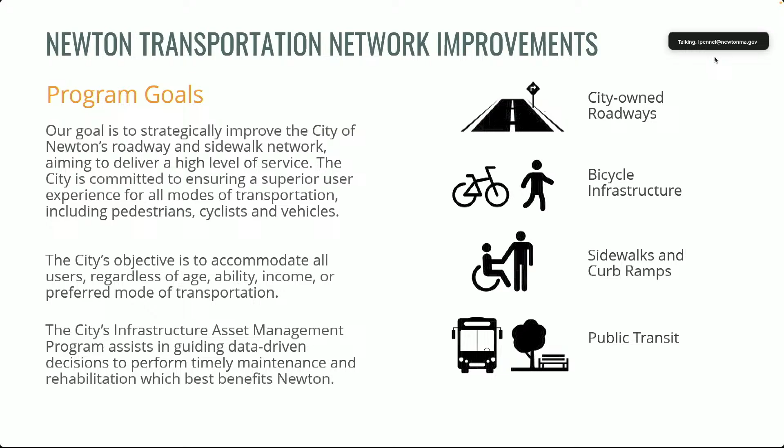So just quickly, one of the bases behind this is pavement management. Obviously, the pavement network is pretty significant here in the city, and we utilize pavement management practices to prioritize the roadways and improve the roadway network. So just real quickly, I know there's some new councilors on this group, so I wanted to start at the beginning and go through the first few slides pretty quickly since some of you have seen these before, and then we'll get into the actual program itself.

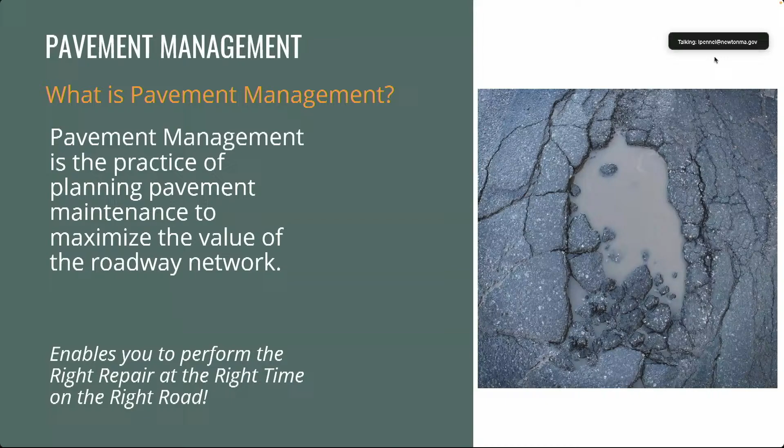This is down in Connecticut. This is a real roadway, and the town line goes right down the middle of the roadway through these two communities. On the right-hand side, community 2 believed in doing pavement preservation, which is those top of the curve treatments that keep the roadway in good condition. The one on the left-hand side didn't really like those types of treatments and performing them.

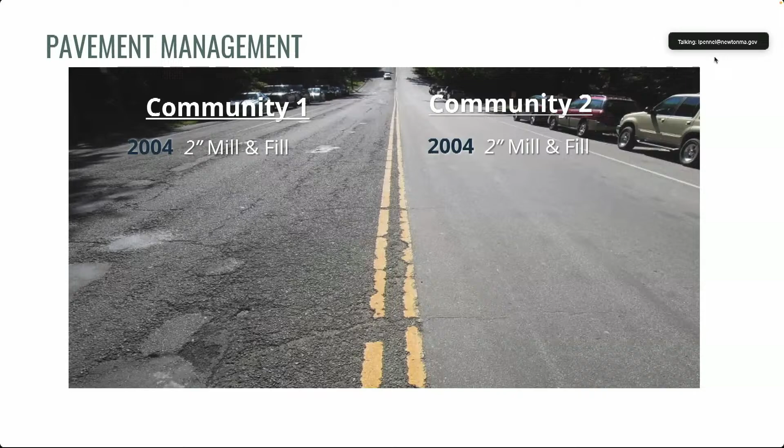So this is a story where in 2004, both of the communities got together and did one roadway project, which is your 2-inch mill and overlay - that's grinding the roadway down, basically starting with a new roadway. Community 2 approached the other community in 2010 and wanted to do some preservation. Community 1 said, we don't do that stuff, we're just going to let the roadway deteriorate, you do your own thing.

So they did a surface treatment and a crack sealing treatment, which is something you see a lot here in the city of Newton. Then in 2017, this is what the two roadways looked like. Really it's one roadway, but split down the middle. You can see on community 2's side, that roadway really just needed more pavement preservation, while the roadway on the left-hand side needed a significant repair, some type of rehabilitation, either mill and overlay or full depth reclamation.

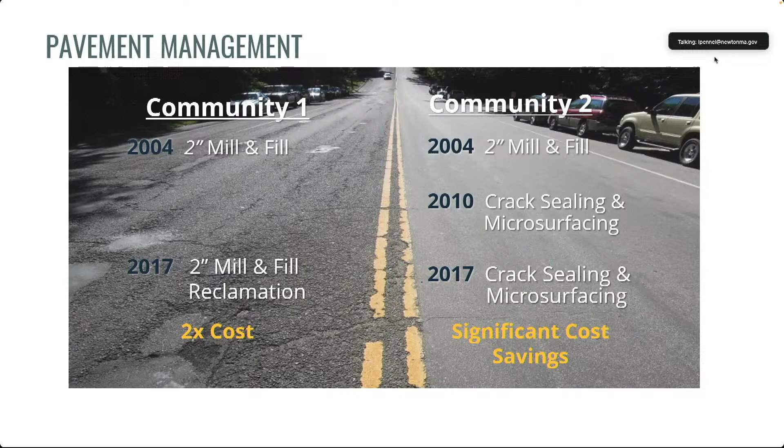You'd much rather drive down the roadway in community 2. That roadway was kept in good condition, but it actually led to significant cost savings as well, because doing the rehabilitation a second time on the roadway on the left was actually 2 times the cost of doing the preservation 2 times. So we like to say that this is the definition of pavement preservation success.

So in terms of the infrastructure assessment, I'm going to go through how we collect some of the data here in the city - about 279 centerline miles of roadway. The way that we collect the data is we actually do inspections of the entire roadway network every other year, and we're using the latest and greatest in terms of technology. We've actually changed the technology a couple times throughout this program.

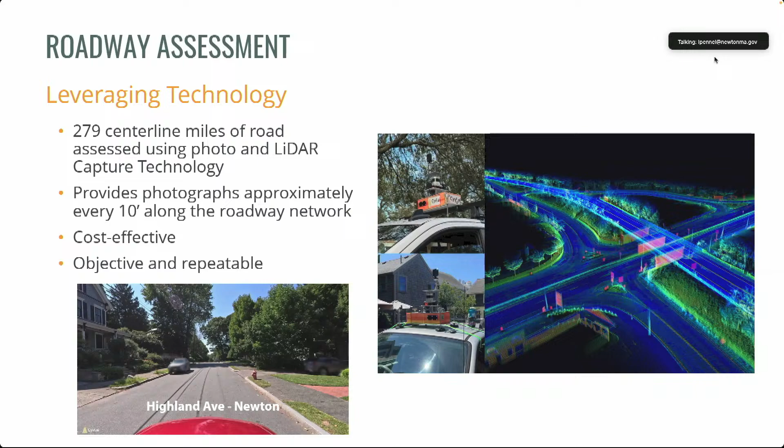Now we're using technology that utilizes both photography and LiDAR to scan the roadways. It allows us to repeat the process every other year, so that we get results that are comparable apples to apples on an every other year basis. It's really cost effective, and we're able to look at the data objectively and repeat that process every 2 years.

In terms of analyzing and reporting, after we get the roadways data back, we split the roadway network from intersection to intersection, so we have reporting on every segment of roadway throughout the network. What we get back from that analysis is a rating, a 0 to 100 scale, 0 being a roadway in poor condition, 100 being a roadway in very good condition. We call that a PCI, or pavement condition index.

That allows us to put each segment of roadway into one of these repair categories. At the top, a roadway in very good condition doesn't need any maintenance at that time. From 90 to 80, it's routine maintenance. From 80 to 70, you're looking at preventative maintenance or pavement preservation. From 70 to 50, minor rehabilitation. And here in the city, from 50 and below, we do what's called maintenance overlays.

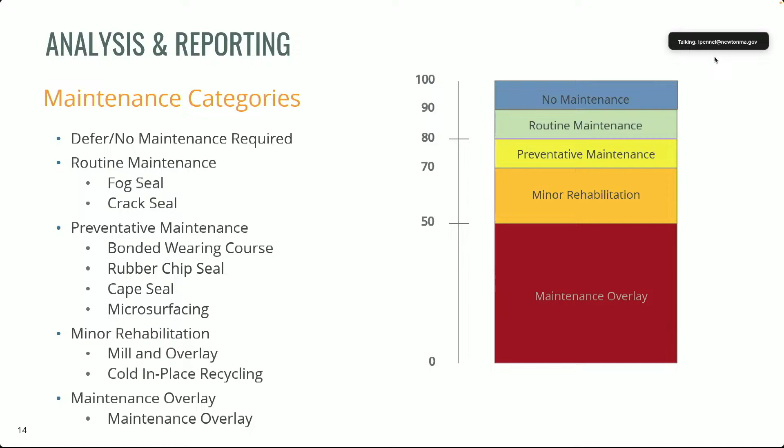Each of these categories has different treatments you can do within them. For routine maintenance, it's fog sealing or crack sealing. For preventative maintenance in the city, we've used bonded wearing course, rubber chip seal, and cape seal. Minor rehabilitation includes mill and overlay and cold in place recycling. And then the maintenance overlays, which I'll talk about in a minute.

So the different treatments, I just wanted to give everybody an idea of what those look like. Crack sealing is in the routine maintenance category - that's the squiggly lines you see all over the roadway. What those are meant to do is fill the cracks so water can't get in, freeze over the wintertime, and bust out potholes. So it's really just preventing water from intruding into the roadway.

Fog seal, I liken it to sealing your driveway, but obviously a little more intense for a roadway. It's some sort of spray - almost like a sunscreen for the roadway, revitalizing that top layer of pavement.

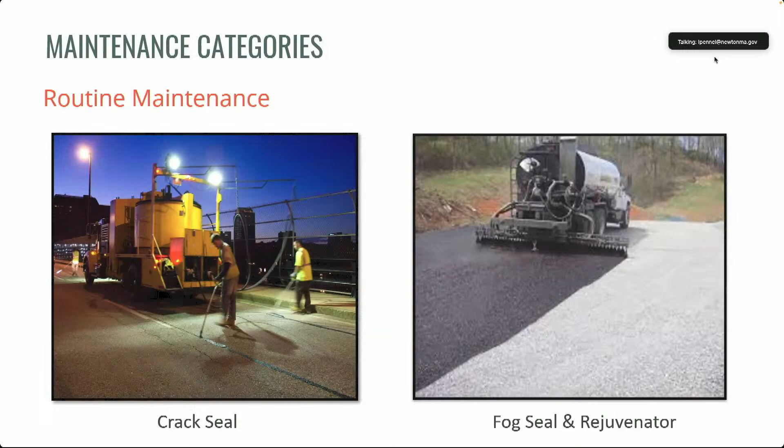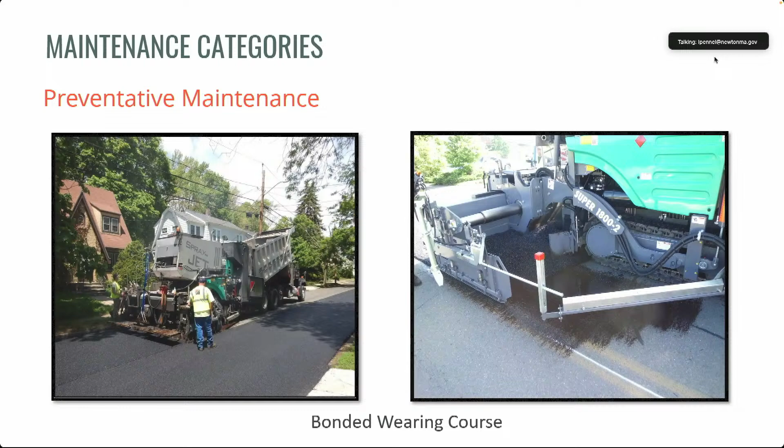Then you get into preventative maintenance. One of the major treatments we've used here in the city is called bonded wearing course, or ultra thin bonded overlay. There's very minimal scraping of the existing surface - we do that on areas that need to be patched, and then we come over the top with a thin layer of asphalt. It's done by a special machine, and it's really nice because it can move down the street like a train, and is very easy for traffic to maneuver around since you can put traffic right back on it afterwards. If you went to work before this treatment started and came back after work, you'd think you had a brand new roadway.

Then we get into rehabilitation. Mill and overlay is probably the most common type of roadway treatment in Massachusetts. You're scraping off somewhere between 1 inch to 2 inches of existing pavement, taking that asphalt away, and coming back over the top with a new asphalt pavement layer. So it essentially looks like a brand new roadway at the end.

Reclamation, we've used that here too. That's very intrusive - it's really pulverizing the existing pavement that's there and then coming back over the top of it with a new layer of asphalt.

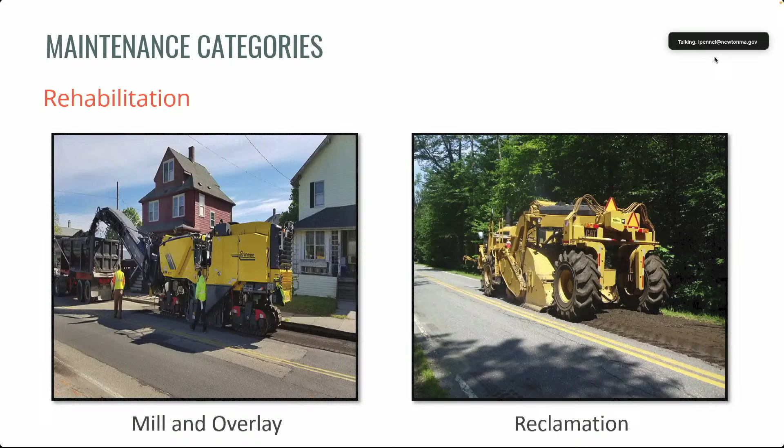The maintenance overlays, on the left-hand side - we've used this for local roadways that are in really tough shape but there's not enough funding to rebuild the entire roadway. It's worked really effectively since we implemented it as part of the program, where you're doing some spot repairs and then coming over the top surface with a thick layer of asphalt, and making sure you're meeting in your gutters and drainage areas as well so all the water is flowing off the roadway.

Last one, cold in place recycling. We've seen this on Chestnut Street as an example, where it's a type of asphalt recycling - a green treatment where they pulverize the first 2 to 6 inches of asphalt, bring it through a rejuvenator, add agents to it, put it back down, and then go over the top with some sort of treatment afterwards. So again, we're trying to use all the tools in the toolbox that are available and appropriate for the city.

I don't want to forget about the pedestrian network. We do have a full inventory completed in May of 2022, where we inspected 415 miles of sidewalk. City staff actually performed that inspection, and we've been keeping it up to date. What it also found was 5,400 curb ramps in the city. 774 of those have been reconstructed since 2017, and approximately 39%, or 2,100 of them, are still not really in compliance. So we're still kind of pecking away at those as we go.

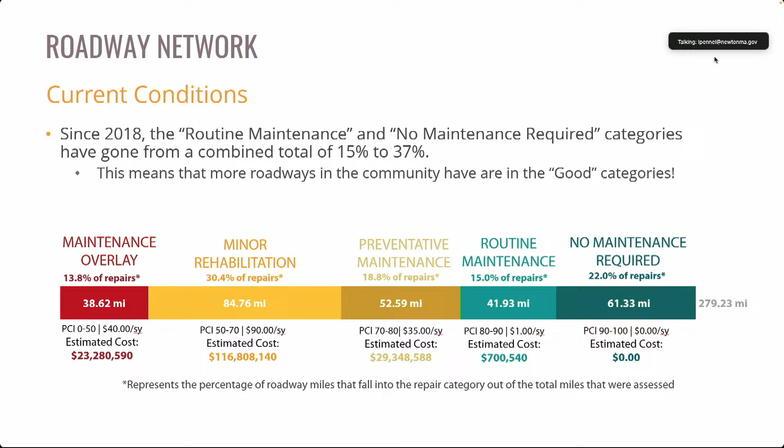One of the things I did want to point out here that is pretty significant is since 2018, routine maintenance and no maintenance categories, so those are the roadways in the best condition in the community, have gone from 15% of the total network to 37% of the total network. So many more miles of roadway are in really good condition.

One of the ways we can show that as well, and one of the goals of the program when we started it, was to really focus on improving the roadways that people travel the most and make sure that we're tracking those separately. This shows right here - arterials and collector roadways - and I'll give you some examples of some of those that have been done here in the past couple of years.

They started this program in 2017. Those roadways were rated at a 69.5. They currently now stand at an 81.2, if you were to look at the average of all those roadways - an 11.7 point improvement of the average rating of those roadways. Local roadways, we've also made a significant impact there too.

59.3 in 2017, all the way up to a 69.2 in 2025. So a significant difference on both.

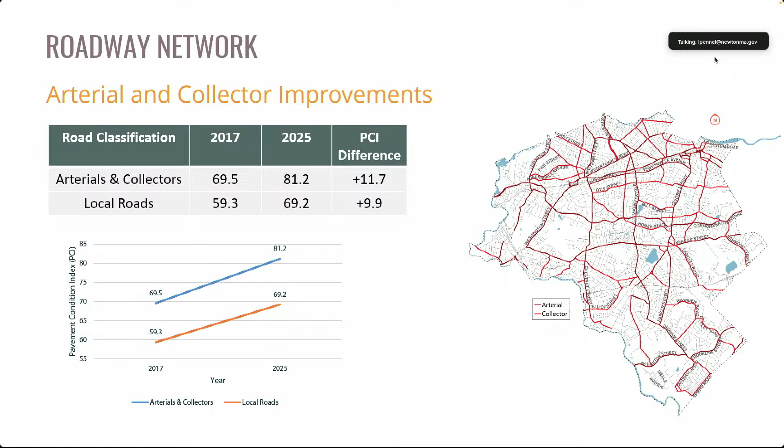On the right-hand side, that map highlights all of the roadways in the community classified as arterials and collectors. More importantly, some of those roadways have been worked on in the past couple of years, like Ward Street, Highland Street, Chestnut Street, Austin Street, and Lowell Ave. Those are some of the significant roadways on the arterials and collectors that you've seen work performed on over the past couple of years.

This does not include roadways in the routine maintenance category. We kept those out because those are sporadic, and you might actually do one segment of roadway multiple times in a 7-year period to keep it in good shape. So this is just all the major paving projects that have happened in the city since 2017.

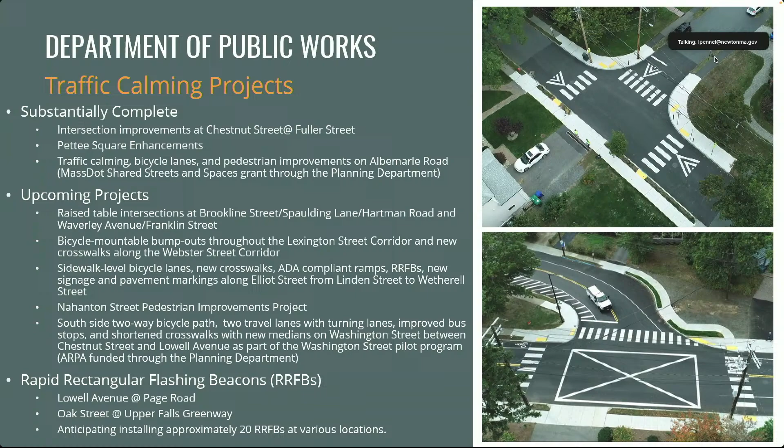Bike lanes - we know the bicycle network here in the city is very important for people to get around. As part of the program, we're completing bicycle lane installations when rehabilitating roads and sidewalks. Recently completed ones include Albemarle Road and Lowell Ave, with some upcoming ones as well.

Some program updates and next steps. The program has gone on for the past 7 or 8 years, but it hasn't been without challenges. One thing we did to show some of the challenges we've encountered throughout the program is look at how far the dollar is stretching, and I think that's important to talk about.

We all know costs have gone up in general in that time frame, but we did a side-by-side comparison between 2017, when we put the models together, versus what we're actually getting now. A couple factors lead to this - overall cost of construction has gone up, specifically right after COVID. Also, we've expanded the scope of non-pavement roadway assets - we always included sidewalks along with the mill and overlay and reconstruction projects, but now also curb ramps, traffic calming, bike lanes, and drainage improvements where needed.

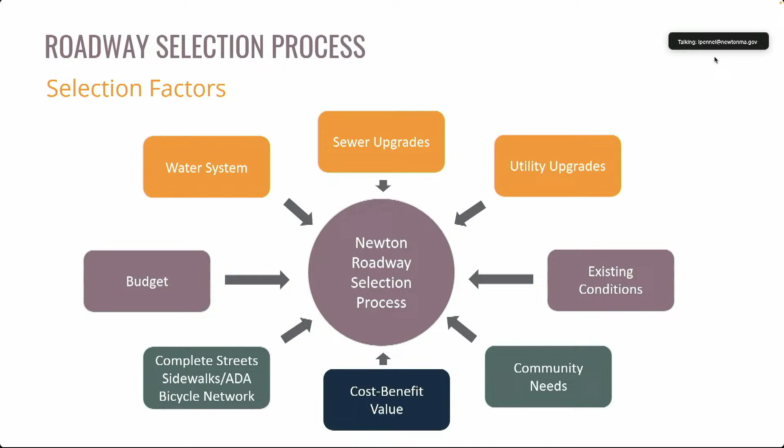One thing I wanted to point out is the typical budget for roads has been set at $9.5 million. Not all of that gets used for straight construction—there are other things we do with that money, specifically traffic calming, intersection improvements, and any engineering design needed to be able to construct the projects. All of that comes out of that 9.5 million.

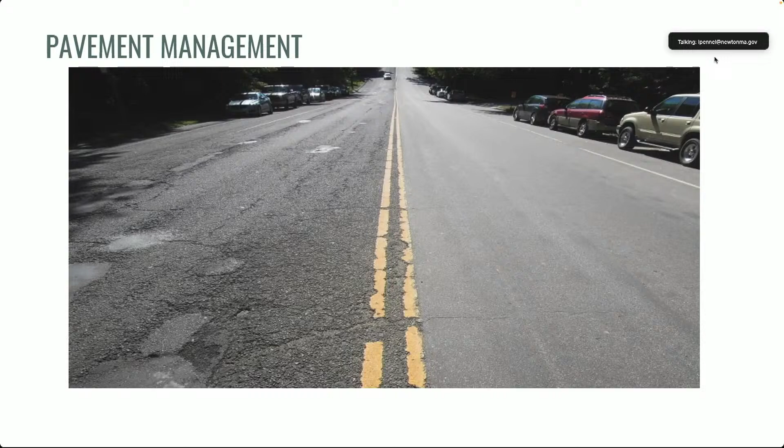But you have to have the roadways in better condition to be able to spend money on those categories. So I think we're at the point now where we're looking at what is the best model moving forward, how much of that work can we do on a yearly basis, and understanding how long can we do that for before we have to pick up and do more on the bottom of the treatments. So that's part of the model analysis that we're doing on a yearly basis.

So just moving forward, I know I've been talking for a while, and I'm sure people have questions. We continue to do updates.

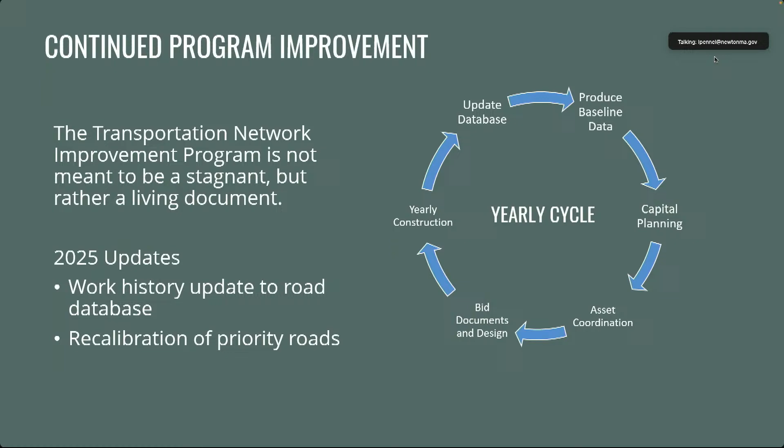So from there, that's the end of the presentation, but we're happy to take any questions.

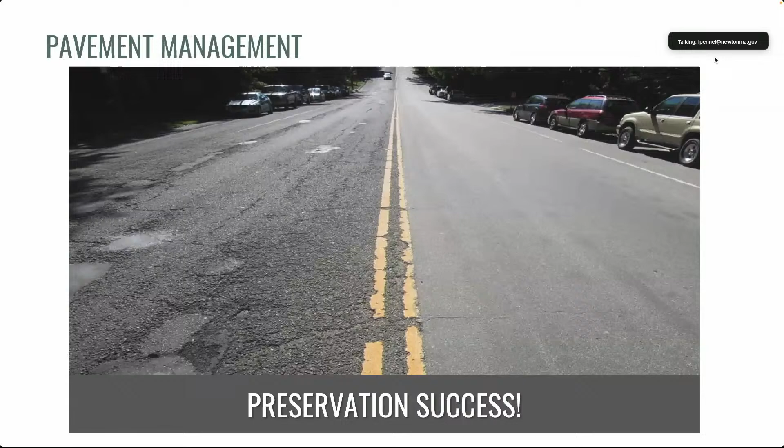So we got our $8 million, right? That goes directly towards paving. Right, plus the ARPA funding that was remaining, we've done a ton of ARPA work as well, probably $6 million worth of ARPA work. So we have about 2 million of ARPA money left. Yes, we're gonna carry that over to this year, gonna use it up pretty much. Yeah, we have to. So it's gonna be gone in fiscal 25, or calendar 25? It has to be gone by calendar 26, right? December 31st, 2026, correct? Yes, it could go through next year, but we're gonna spend much of it this year.

Alright, so I just want to go back to the spending if you don't mind. Yeah. So I wanna just understand more where we are. Okay, so right there, yeah, okay, so in 2022 and 2023 we spent less of city funds because we had all this extra ARPA money. In 2024, we upped the city funds by $3 million. Yes. Okay, so it's important to note though, this was what was budgeted, doesn't mean we spent that. That was budgeted, so all of our roadway money, if we don't spend it, rolls over year to year. I understand that, but in 2025...

We budgeted $9.6 million, right? Yes, plus some grant money, leaving that aside. Of that 9.6 million, how much is included as rollover from the prior year?

So we're rolling over 1.5 million. We're really spending 8 million of new funds next year, plus we have grant money, 3.2. Is any of that grant money at risk? I don't believe so.

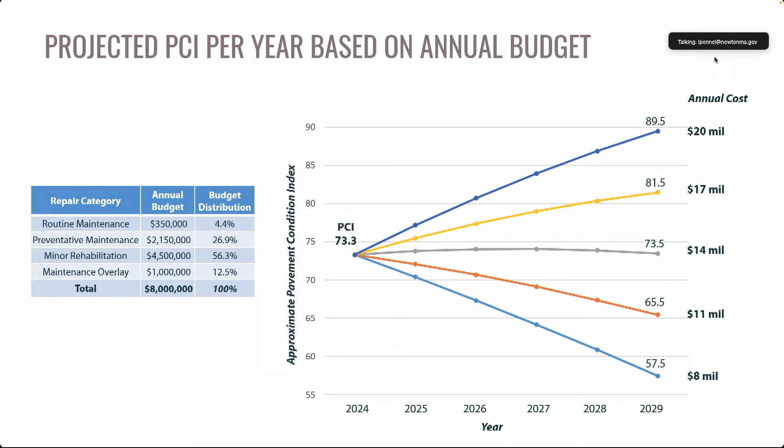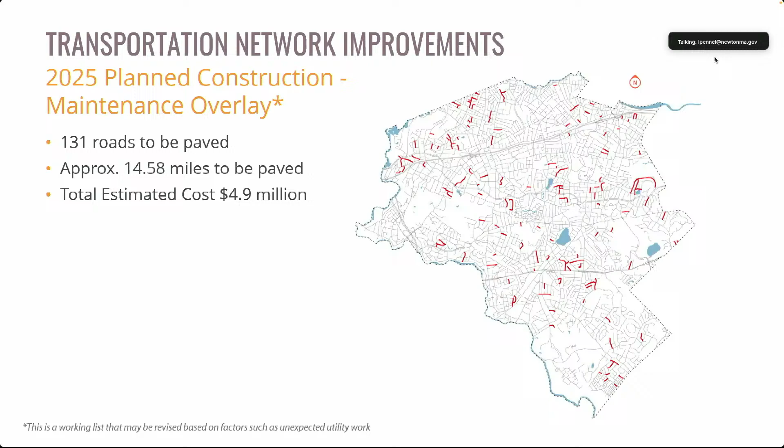So there was - I forget what it was - I think it was Lowell Ave from Washington to Foster Street. Was that on your slide for a project you're going to be doing? No, as an intersection, we did that portion of Lowell. It was a - can you maybe go towards the end of your slides? It was somewhere.

Oh, was it the Washington Street pilot? I have no idea what it is, I just took it and wrote it down because it's a very small piece of roadway. Really? Because we did Lowell from Washington to Walnut. Okay, well it was somewhere on your slides and I was wondering what that was. When you see the slides tomorrow in greater detail, let us know and we can get the information for you.

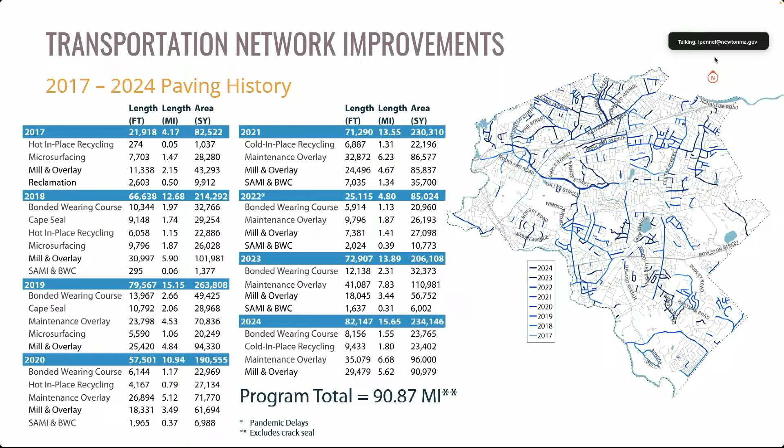Yeah, let's - is this the one? Lowell, Washington - that was a completed project. Oh, those are completed. Yes, so these ones here were examples of arterials and collectors that have been completed during the program. Okay, yeah. And I know there are a lot of smaller roads that are in terrible shape.

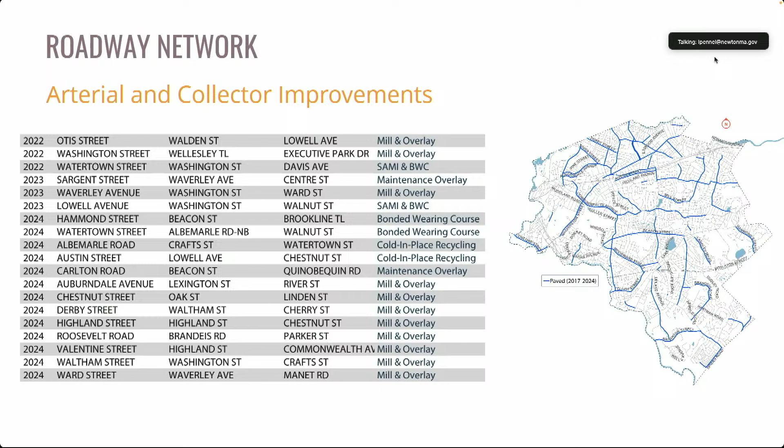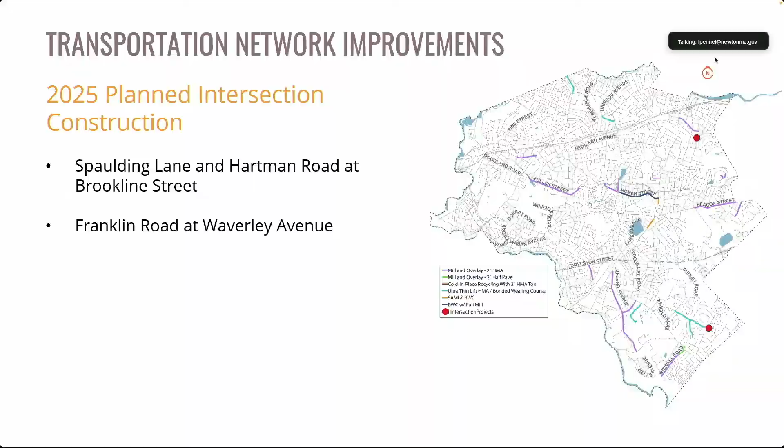Yeah, I think one of the challenges, one of the realities, is that a lot of these roads - the last time they were measured - were not in the 30s and 40s, they were in the 50s. And some of these smaller roads have gone downhill quickly. So that is why we need to address these - we're getting complaints about all these roads. Roads in the thirties and forties are not great roads at all - these are small streets that you would know you're driving down a bad road.

So we want to get further up into the fifties, and we will, and we just need to keep this program going. Well, this year we'll get up to here, and then hopefully in the future we will keep going. Seriously, it's gonna take - as you saw - the budget realities are that the money doesn't go nearly as far as it did when Setti Warren...

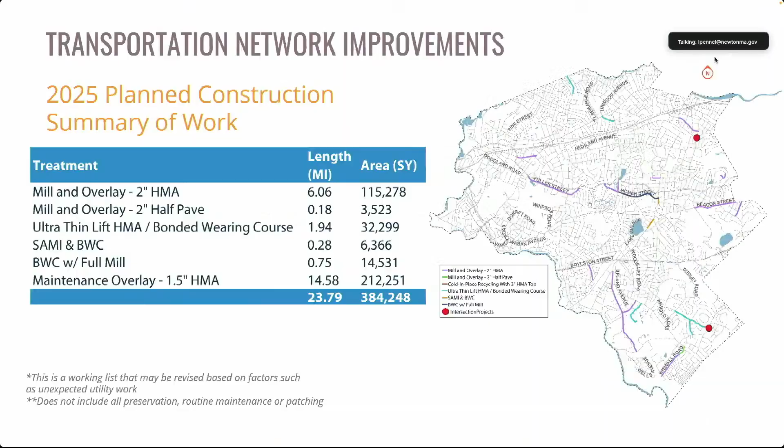This was an aspirational program of $9.5 million, because it wasn't funded - it still isn't completely funded. We rely every year on free cash. Certainly we get Chapter 90, but that's only $2.3 million a year. So we've continued to add money to the budget every single year, but we still rely on free cash to get us there. Fortunately, we had ARPA, and we've used a lot of ARPA money, and fair share.

And the fair share, the millionaire's tax money that has been coming, not sure if that will continue to come to the city. So, we're gonna need to find ways to fund this program.

And to keep those small roads from slipping down that precipice, couldn't we just call that traffic calming? If you live on that street, you might not be happy, some people actually like their streets like that, because people don't wanna go down them fast.

The good news, and the really great news, is that we have a great team of DPW and consultants and this committee. This committee has been able to understand these things pretty well, so I think everyone here is a good team to keep this program going. It's gonna require funding and commitment.

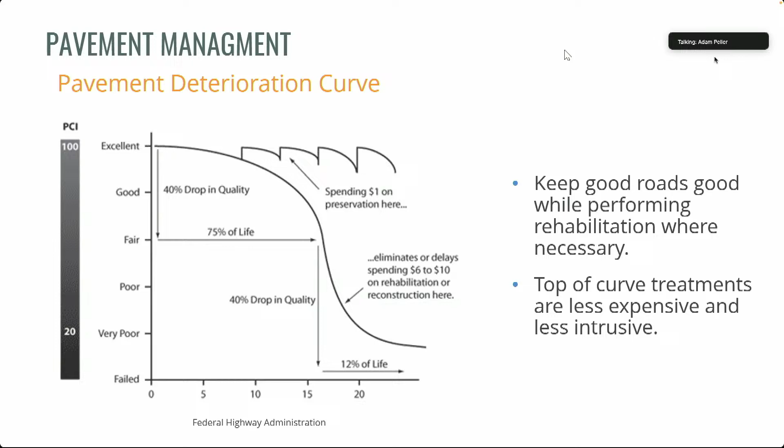Hi, Adam Peller, 28 Daniel Street. I'm on the Transportation Advisory Group with John. I have a couple questions relating to Newton Center. If I remember correctly, there was some road work planned, it looked like around Trinity, maybe near the playground on Center Street, and curb work near Sweet Tomatoes. I was wondering if there are opportunities there, or if it's just going to be done in place, or if there's any thinking around geometry changes and improvements. I can give you some examples. A couple years ago with Director Friedman, we talked about changes since the fire department is now operating in a different direction - whether the intersection at Willow could be improved. Nobody ever stops there, and the crossing is a very long school crossing. Similarly, near Sweet Tomatoes, it would be great to see curb extensions, kind of like we have up by Union Street - is that the Union Twist money? And I know we had put off the curb work at that intersection in anticipation of curb extensions. We didn't want to put in ADA curbs and have to rip them out to make roadway improvements. So is any of that in the plan? And if not, could it be?

So we are doing an ADA improvement at Langley, Sumner, and Beacon, and in order to get the slopes right, I suspect that we will be bumping out.

Okay, that's great. And how about Willow - are there any geometry changes planned there? Not right now. All right, thank you. We're paving there. Yeah, once it's paved, the opportunity is probably gone for a generation, so I just wanted to point that out. That does not preclude any type of traffic calming or bump outs ever.